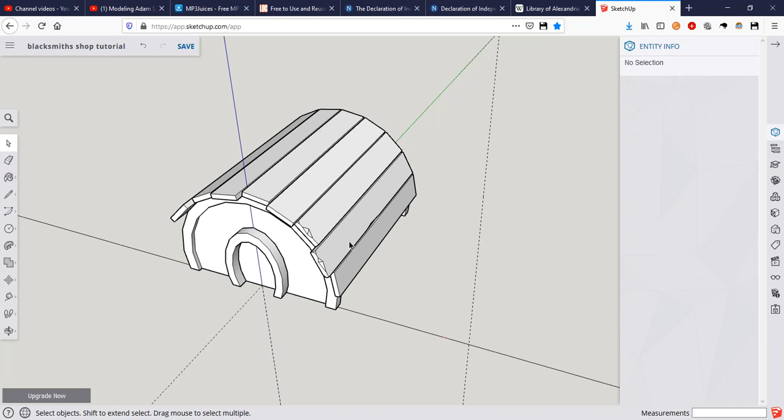But if you're planning on printing things that you make, try to make every object a solid the best you can, even if they're just floating solids. And what I mean by that is a solid sitting on top of another solid, and I'll explain that here in a minute. So go ahead and hit C.

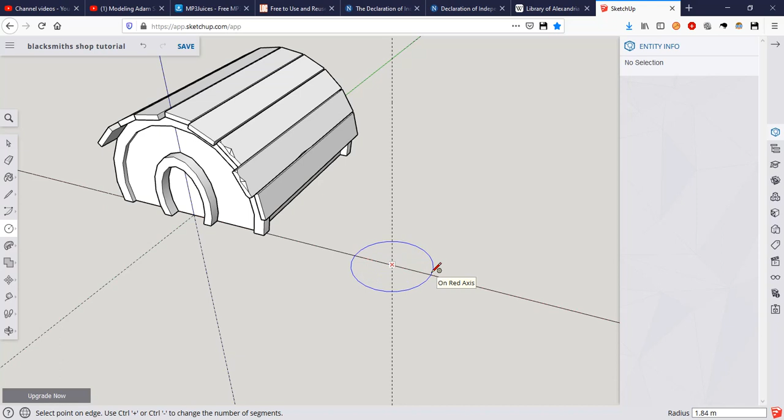Go ahead and hit T and drag a guide from the blue axis some arbitrary distance over here. Hit C and make a 24-sided circle, or however you want. Then we're going to run along the red axis, right arrow key, and type in 3, make 3 meters. We're going to hit P, and lift it up 6 meters. Okay, we're going to make this a group.

Okay. Now, up here in Entity Info, it is a solid. That's what we want. Now we need to make the revolved portion, this little hemispherical shape. And that's actually really easy to do.

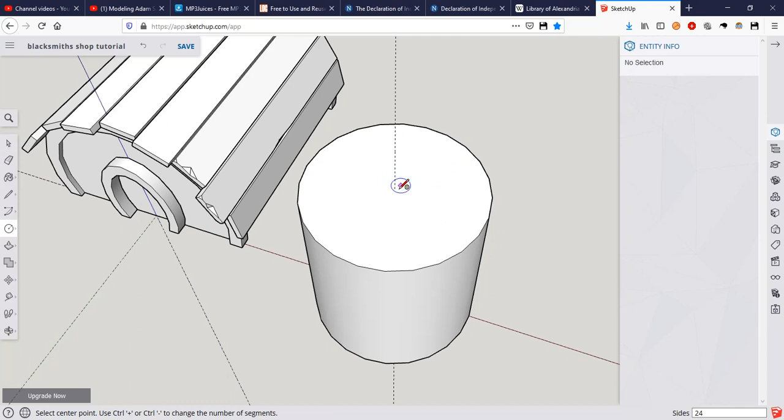That's where the Follow Me tool comes in. We're going to hit C. We need 2 circles. One along here at 3 meters, that is our guide for it to revolve around. And then we got to go back to the center. Going to hit the left arrow key to make it green along the green axis, and hit the red arrow key and type in 3. We're going to have that.

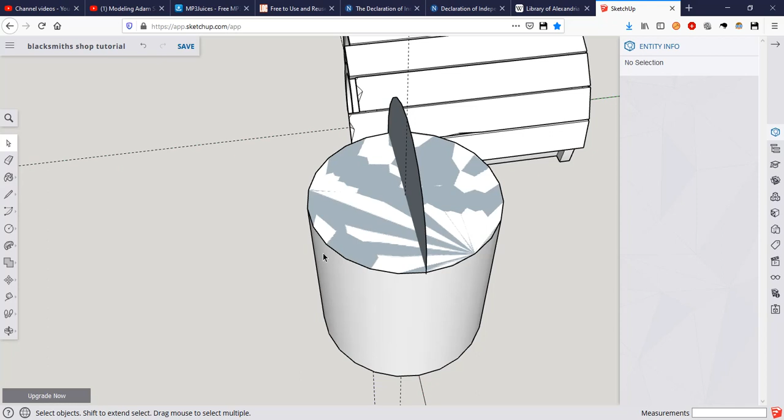So now a lot of people are going to make this mistake where they select their path and then hit - first we got to select the Follow Me tool, okay, and you hit the path that you want to extrude about, click Follow Me, and then you click the object you want to extrude, and they're going to freak out wondering what just happened.

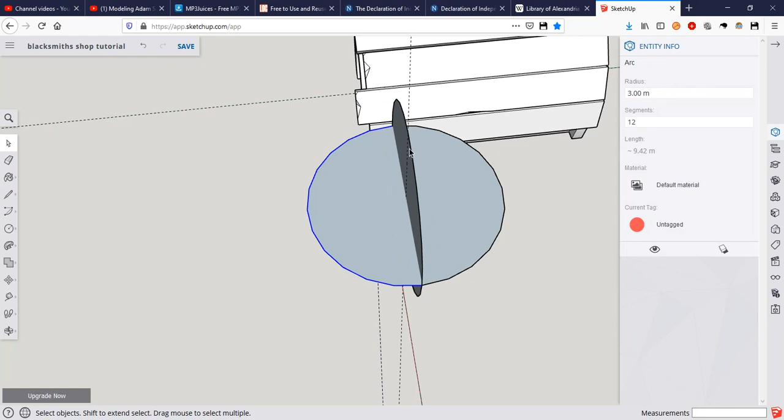That's because when we made that top circle, look what happens when we select this edge - only half of it is getting selected because this is cutting it in half. So we need to select both of them, hit Follow Me, and then click the face. Okay, triple click, reverse faces, we want it to look nice.

Okay, so now this is technically not a solid because we have this internal face from that circle left there. And you could, if you wanted a perfect sphere - one way we could have done it is, instead of using the circle right here on top, we could have made the circle at the bottom underneath it, and it would be a perfect solid.

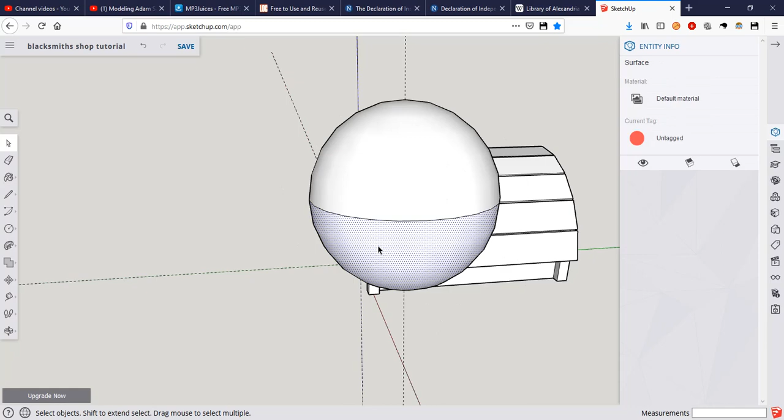But the reason why I chose to do it right here is because we don't need a full circle, we only need half circles. So go ahead, delete that bottom face off, and now triple click it, make a group, and it will say solid.

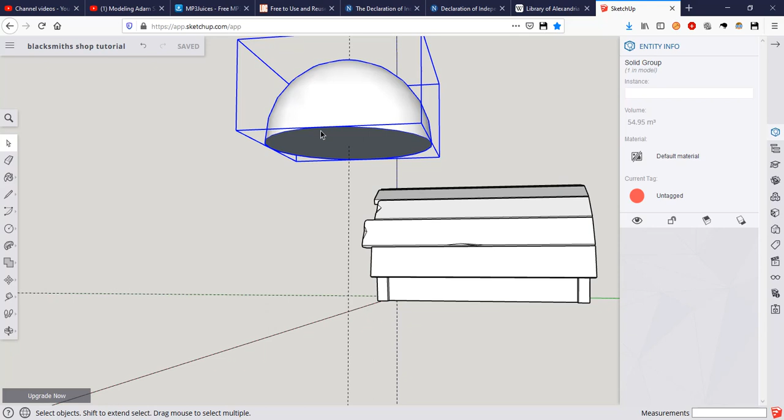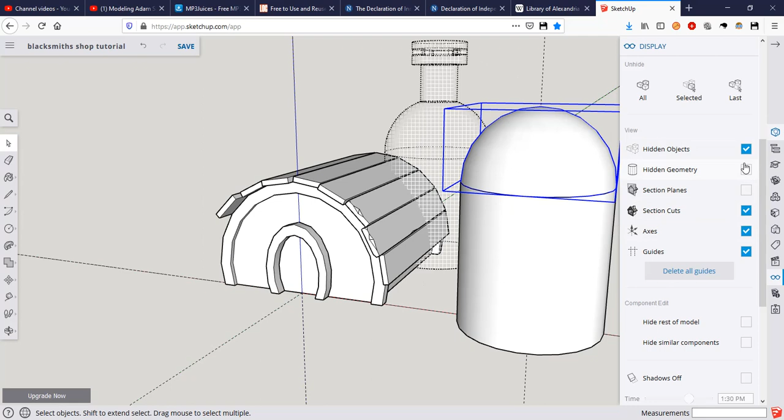So this is what I mean by floating solids. We have that solid and this solid, and they're just right on top of each other. Now, if we were to cut this, paste it in place in this group, and intersect the faces, we would have to clean up the model by getting rid of that internal face in order to make it a solid.

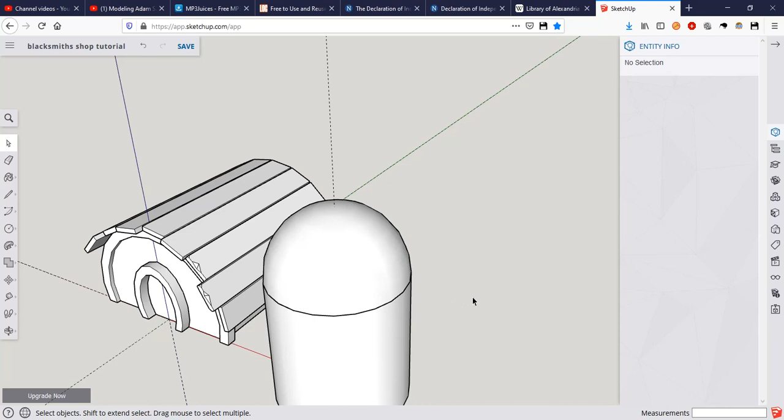I'm not wanting to do that because when I exported this, just like this, into a slicer, it doesn't care about that paper thin face. The infill goes all the way across. It doesn't all of a sudden have a solid infill. It brings them in just fine. So I'm not going to worry about it.

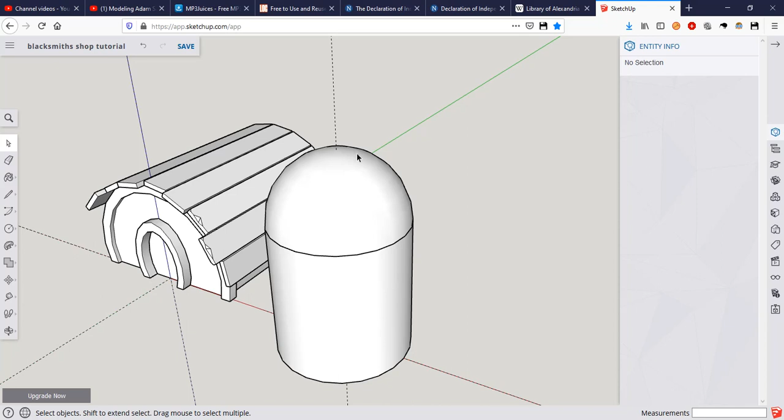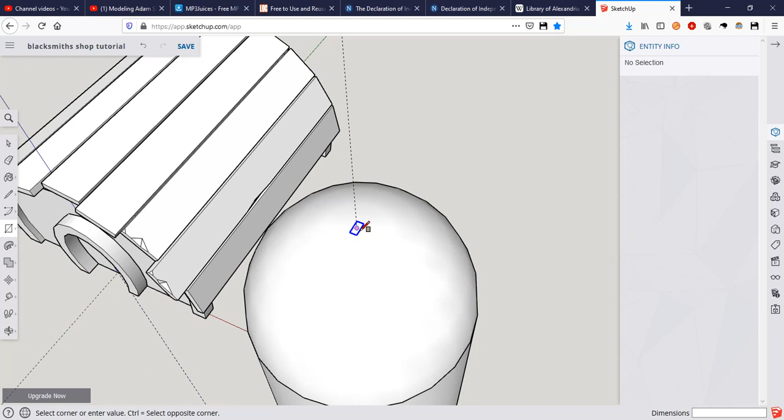Okay, so now let's make this top portion. In order to do this, the best way is to make a flat piece right here to do the extrusion. So let's make that. We're going to take the rectangle tool, R, go right here, the intersection, hit the up arrow, hit the control key to do it about the center, and I'm thinking a 2 by 2.

Okay, perfect. Now, speaking of exporting as STLs, SketchUp exports it as unitless, so when you open it up in your slicer, if you're set to inches, it's going to scale it to inches. Like this is 6 and 9, so this is 9 meters high. So if you're in inches, this would be 9 inches high. Or since it's in millimeters in my slicer, this would be 9 millimeters high. So you're gonna have to scale up. No big deal. I had to scale by 1,000% just to make it visible.

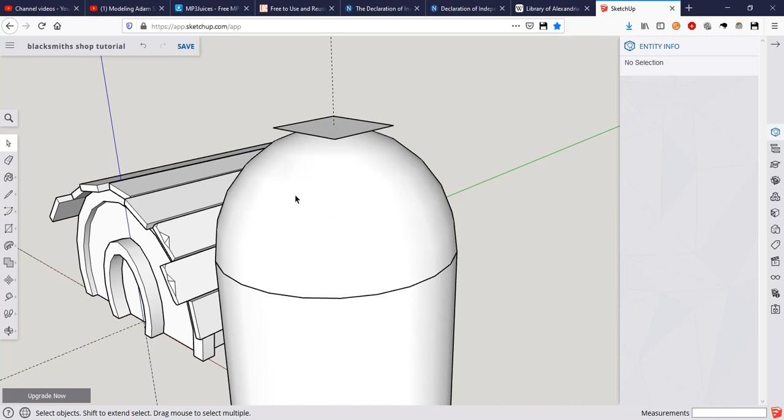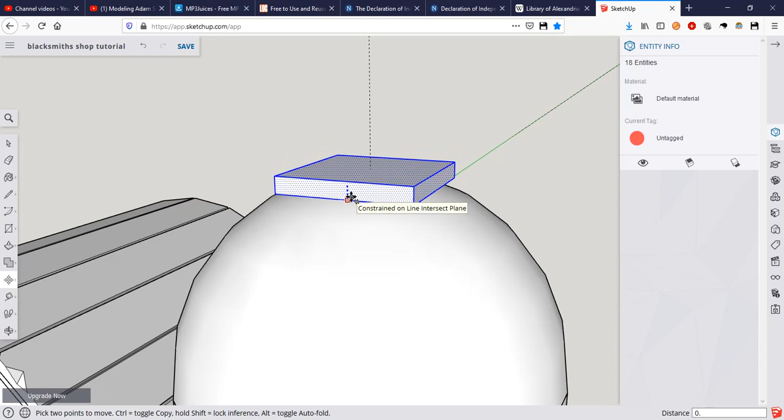Okay, let's push pull this by 0.25. Triple click it, technically we don't need a group. Show you what we're going to do. This is going to be our cutting surface per se. So I'm going to hit the M tool, click on the midpoint, hit the up arrow, and I'm just going to move it down 0.15 meters. Okay, and that looks pretty decent.

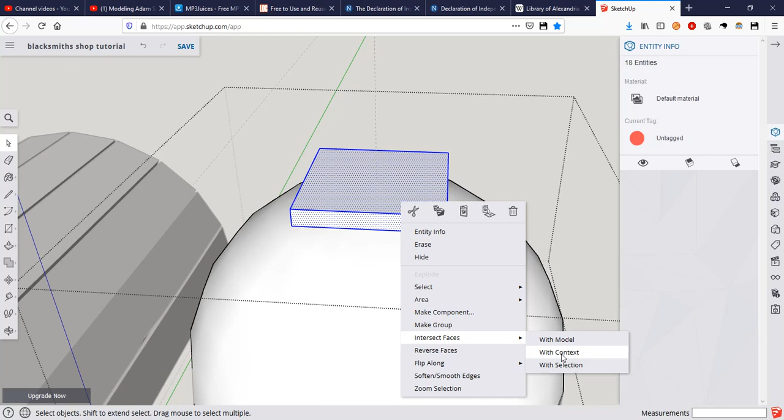So now I'm going to do a control X, go in here, do a right click, paste in place, do a right click, intersect faces with context. Context means within the group. With model, it would just be on the surface. With selection, it would work as long as you have the surface of the dome selected. With context is kind of what it's touching. That's a bad example. I just don't know how to explain it any better. I'm going to try to make a video on that though.

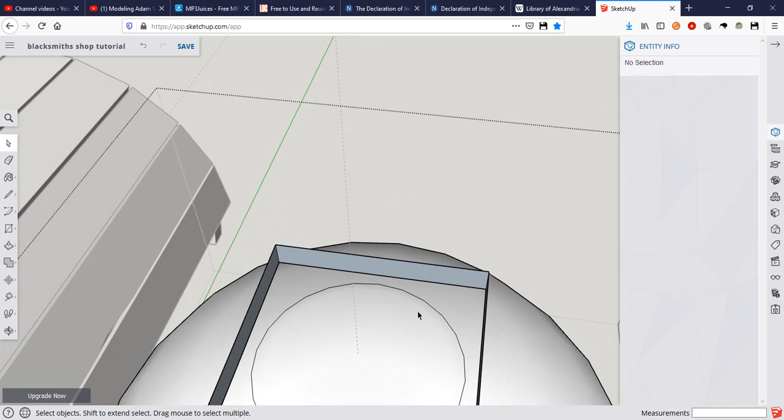Okay. So now you can see how it's made profile lines around there. So let's go ahead and delete that surface. Perfect, we've got our line right there. So let's go ahead and get rid of that. Now you can see on the dome that profile. So I'm going to delete it. And there's our flat spot. Do a reverse faces, and then go ahead and clean up the rest. Okay, now that it's all cleaned up, you can see that flat portion.

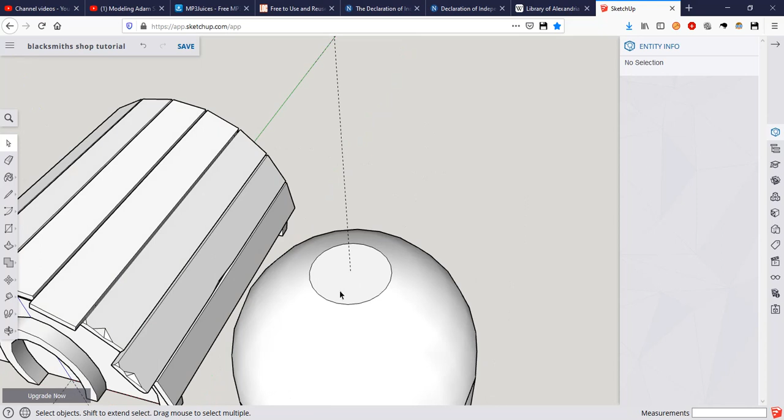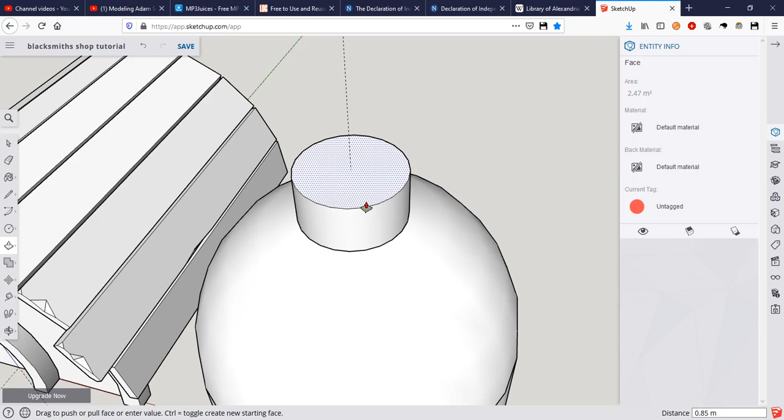So let's go ahead and open it up. Now, no, we're not going to open it up. Let's double check, is it still a solid? Good. You could extrude this portion on the inside, but remember, I like my geometry separate, so C for circle, click it on the intersection, right arrow key, and till it clicks there, it's 0.89 meters. That's okay. And then we're going to lift it up, and I'm going to go 1 meter.

Does that look? I don't know. You guys choose. Nah, 1 meter's not tall enough. Let's go with another ½ meter. That looks good. Kind of looks like an old school bottle. I like that. So what we're going to do, triple click that, make it a group.

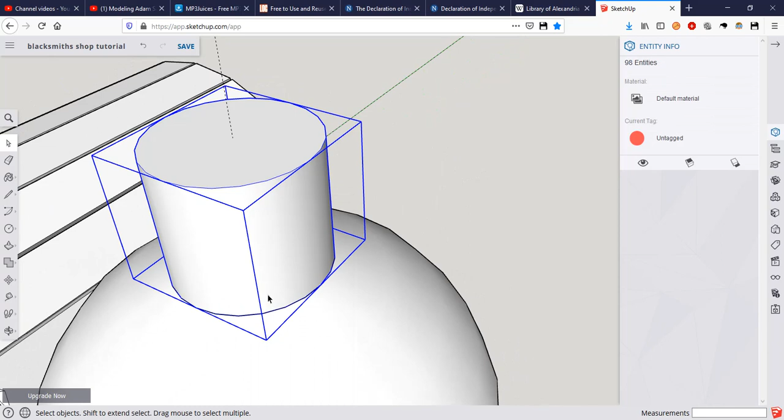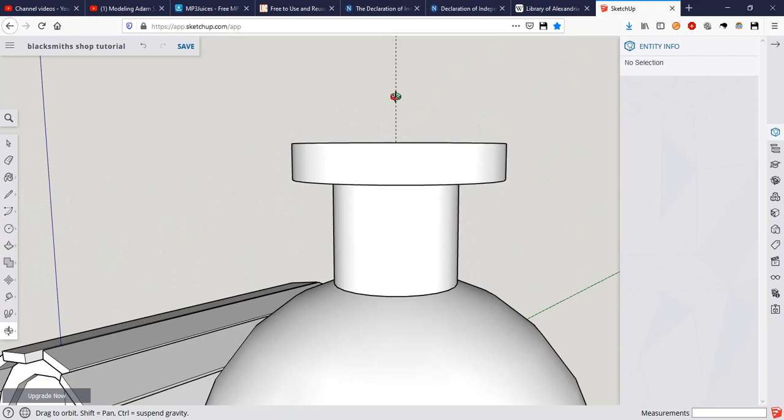Okay. We're getting better. Now we're going to do C for circle again along the red axis. And we're going to go out 1.5 meters. And we're going to go up 0.15. No, we're not. We're going to go 0.5. Let's do that again. 0.5. It didn't register the decimal. Okay. Now, let's see. How do I want to do this? I'm debating if I want to make this a group or not. You know what? Let's just make it a group.

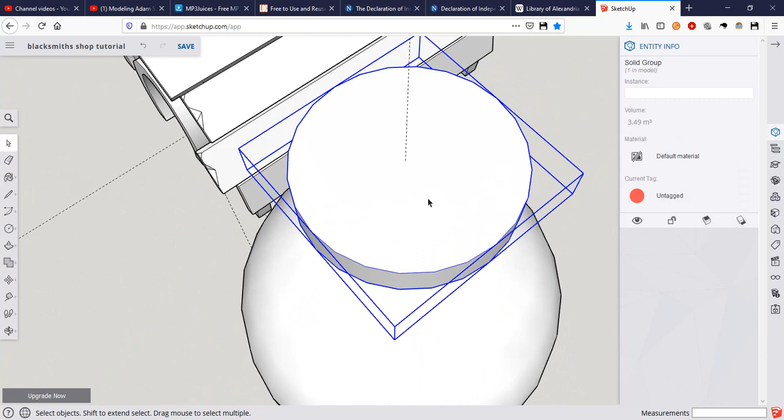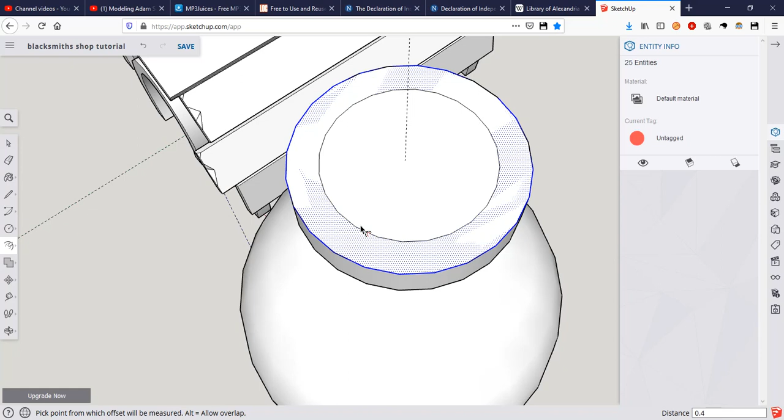Okay, now what we need to do is offset a small circle right here. No, let's go in, let's grab this top face, control copy, do a paste in place. Okay, and then we're going to do an offset of, let's do 0.4. Okay, and then we're going to delete that face, so all we have is this ring.

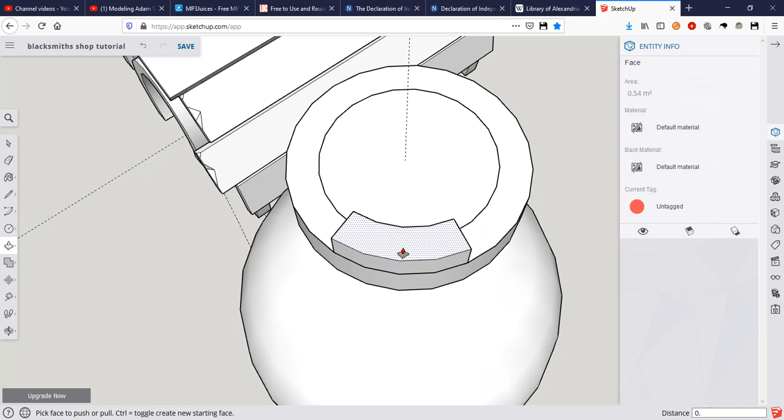And what we're going to do, take your line tool, and you're going to draw a line from edge to edge right there. Let's do this one to that one. Push pull, you're going to lift it up 0.5, and you're going to do that 3 times. And we're going to try to make sure it stays a solid. Okay, push pull, double click it. Okay.

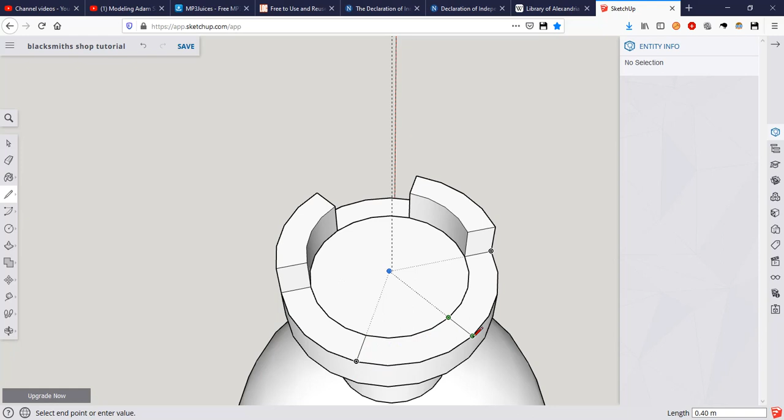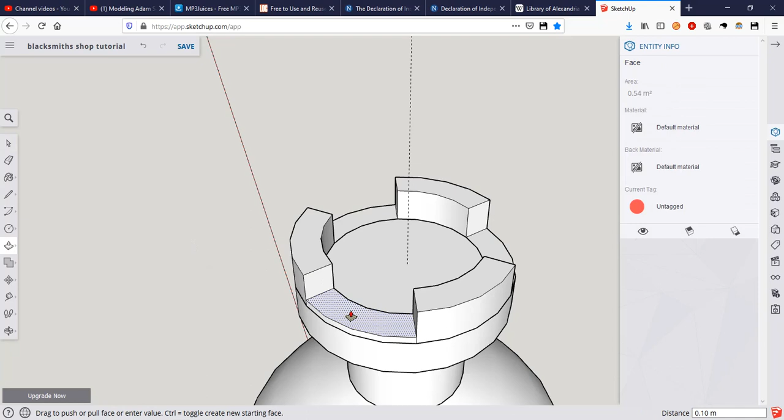Push pull, double click. Okay, so let's triple click that. The only downfall with this is we've got this paper thin face right here, and SketchUp is not going to like that. So we could lift up each edge just for some extra ambiance. Double click it, or you could delete them. Personally, I like the look of that, so I'm going to triple click it, make a right click group, and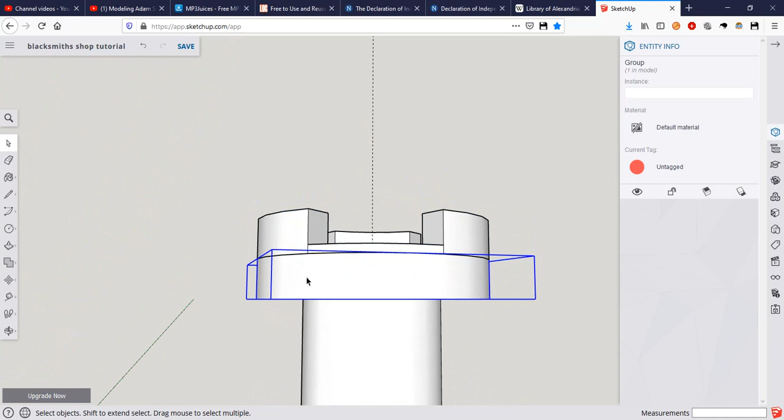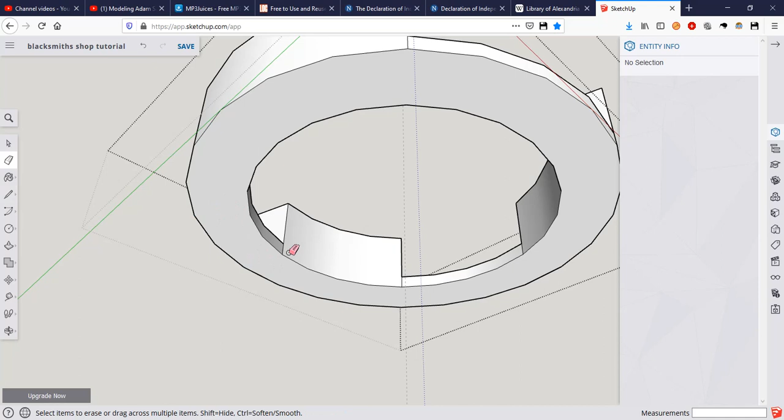it's definitely not a solid, mostly due probably to, see if we can hide that, due to that. So let's go ahead and close it off. This can get a little tricky. So you're just going to start closing lines off until the surface closes. Okay, so inside the group, it took me 2 lines. It took one from here and one from there. So I'm going to go ahead and erase those. Hopefully now it's a solid.

It is. Perfect. Okay, so sometimes that happens when we extrude. I don't know why it does that. I've never been able to figure it out. It happens in the Pro version, so I'm not going to worry about it. But just remember, sometimes that happens.

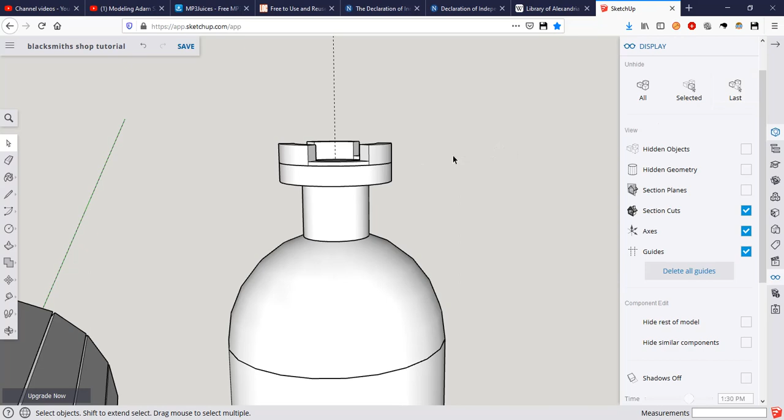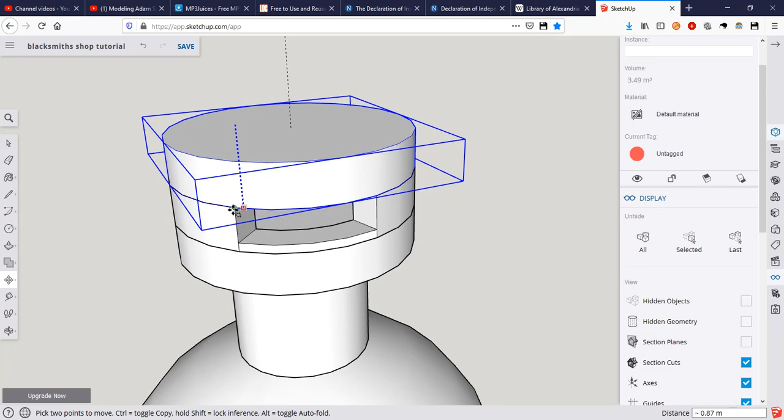Okay, now that's good. So, let's go ahead and make a copy of this. Hit the Move tool, and then Control, click, and then up arrow to bring it up, and just bring it to there. Click again, and then just bring it until it's constrained on that edge right there. Okay, and there we go. Everything right here is a solid. Let's go up to entity info. Yep, solid, solid, solid, solid, solid, solid.

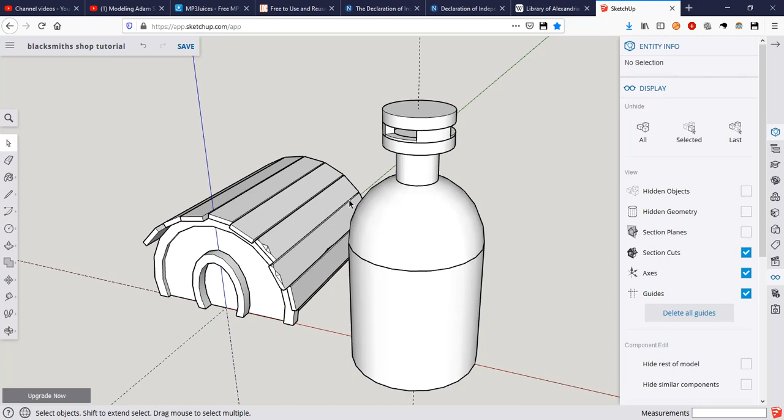Now, you could intersect them all, but that would take a while. I don't need to if we're just making a cool render of this. So, now, whoops, don't triple click. You want to highlight everything, okay? And then we're just going to move it into place. Okay. Now, this is what is funny.

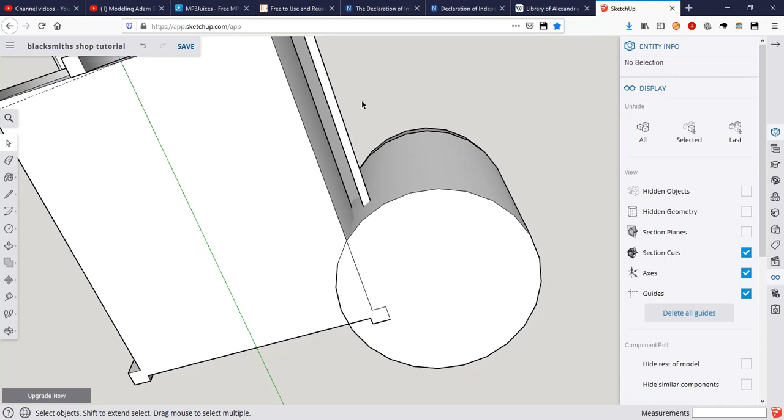When you move it into place like this without intersecting it, when you take it into your slicer, it actually sees this piece in there and starts building the cylinder all the way up. So if you're going to 3D print, it might be best to intersect at least the cylinder portion with the roof, and at least with the main body of the house, and get rid of any internal lines. That way when it exports, you're all fine. But since we're not caring about 3D printing this particular one, we don't need to worry about it.

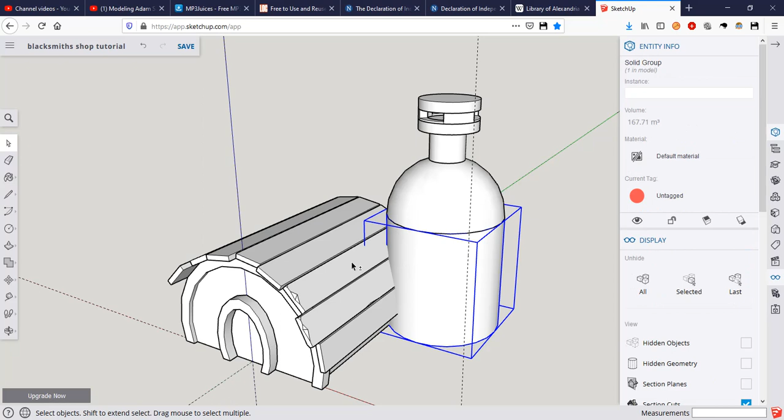The only thing I would worry about is if I click this one, I would right click, intersect faces with, let's try selection, just so that we can get that border right there, even though if we were to move this, it leaves that outline there. But since we're not going to be 3D printing, this is just for a render, it looks like it's connected, and that's what we want.

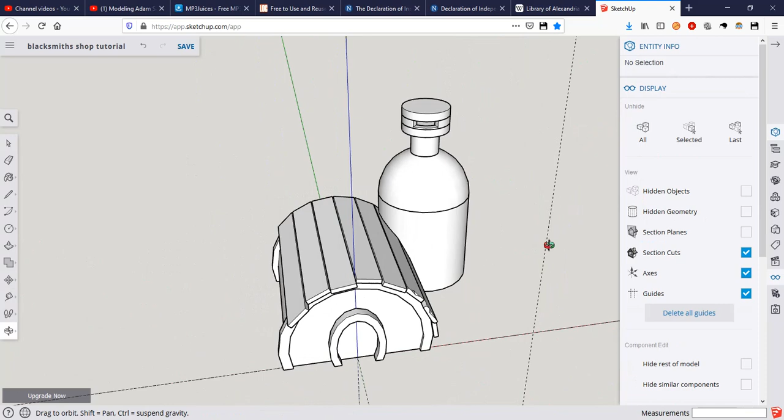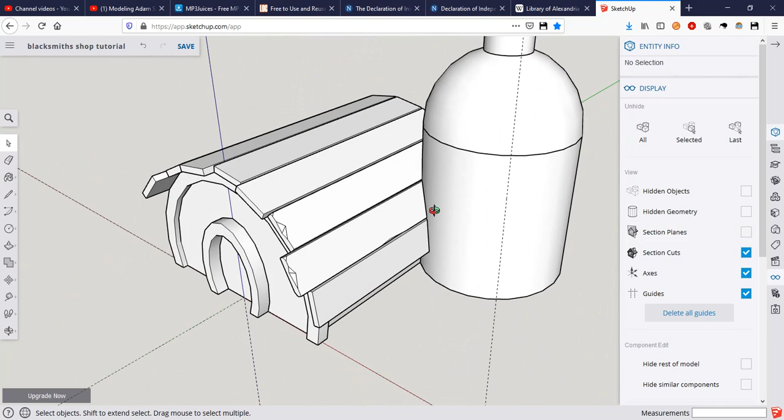And we need to do it with the main body of the house as well. So intersect faces, you do with model or selection. We did with selection last time. Let's do with model. Does the same thing. So okay, now that is all taken care of and done. So we learned a lot today, went through a lot of steps. Not too shabby though, we're getting closer. I mean, this is pretty cool.

So the next video I'm going to show is how to do the rectangular house portion and this little piece. This little piece is really easy. It's actually just a copy of this scaled down, and then this piece right here extruded a little bit and then scaled in a different shape, and then you just smash it in. So I'm gonna let you guys do this piece, figure it out.

This is just an extruded ring, just moved right here, and this is just an extruded arched shape. And this is just a cylinder, and then another cylinder, and then a cone using the Follow Me. So if you want to go ahead and do that, some of these details like the bars and the fire were all added in Photoshop. So if you want to continue ahead of me, go ahead and do so.